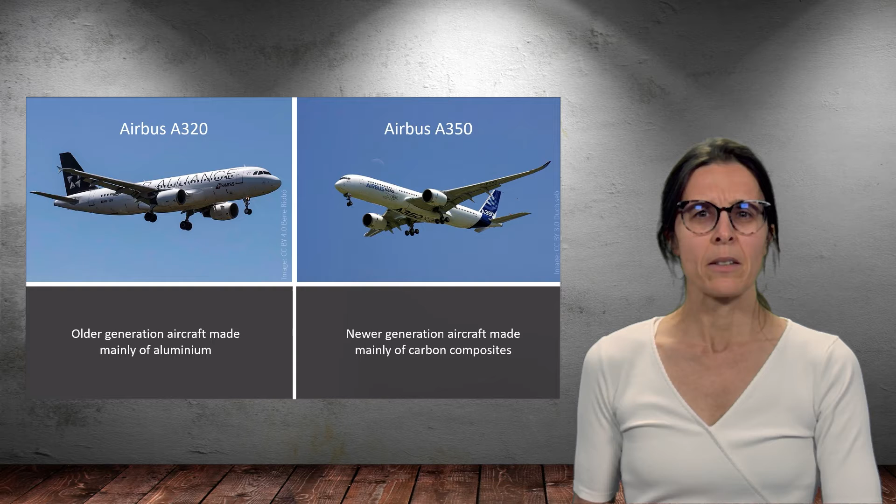As you learned before, newer aircraft such as the Airbus A350 or the Boeing 787 favor the use of carbon composites in their structures. On the contrary, the structures of older aircraft such as the Boeing 737, the 747, or the Airbus A320 are mostly made from aluminum alloys. This shift in structural material from aluminum alloys to carbon composites is driven by a reduction in structural weight, which leads to lower fuel consumption and therefore lower emissions during operations. But how does this material shift influence the energy required to manufacture the aircraft?

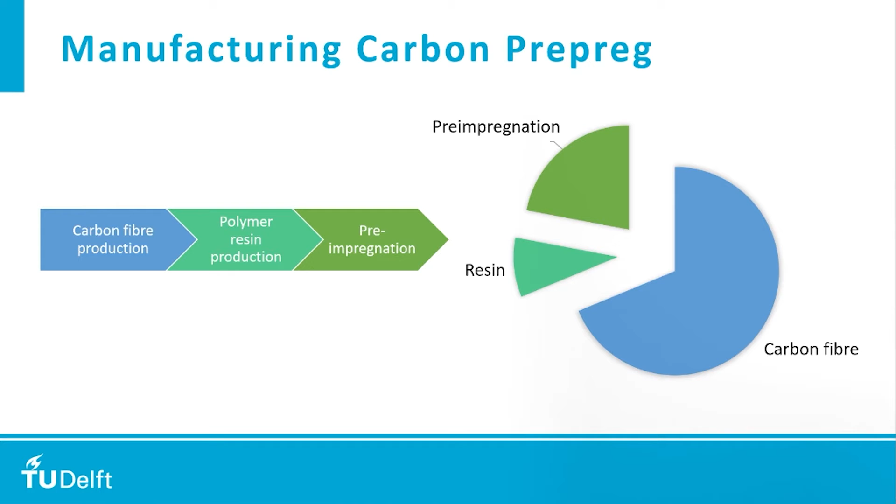Manufacturing of carbon composite prepreg comprises three major steps: manufacturing of carbon fiber, manufacturing of polymer matrix, and pre-impregnation of the fibers with the matrix. Of these three steps, carbon fiber manufacturing is the one that consumes the highest amount of energy, approximately 70% of the total. Carbon fibers are manufactured through the pyrolysis of a precursor material. Roughly 90% of the carbon fibers currently produced use a synthetic organic polymer called polyacrylonitrile, in short PAN, as a precursor material. The other 10% are based on pitch petroleum or rayon precursors.

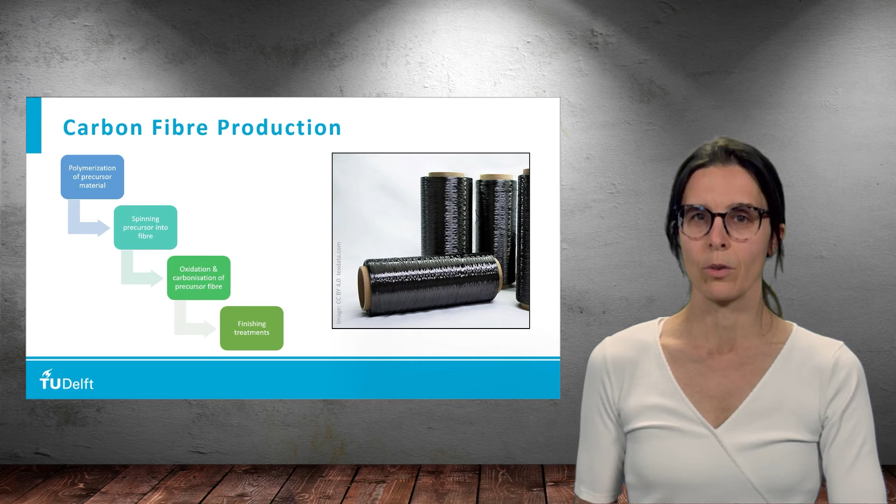Manufacturing of carbon fibers is a complex, very expensive, and as we saw before, a very energy-intensive process that comprises four steps. First, polymerization of the precursor material to create PAN of a certain molecular weight. Second, spinning of the PAN precursor into PAN fibers. Third, oxidation and carbonization, which is a series of heat treatment processes, usually within the 1000 to 3000 degrees Celsius range, that stabilize and burn off the non-carbon components in the original PAN fibers, resulting in tightly bonded carbon-rich fibers.

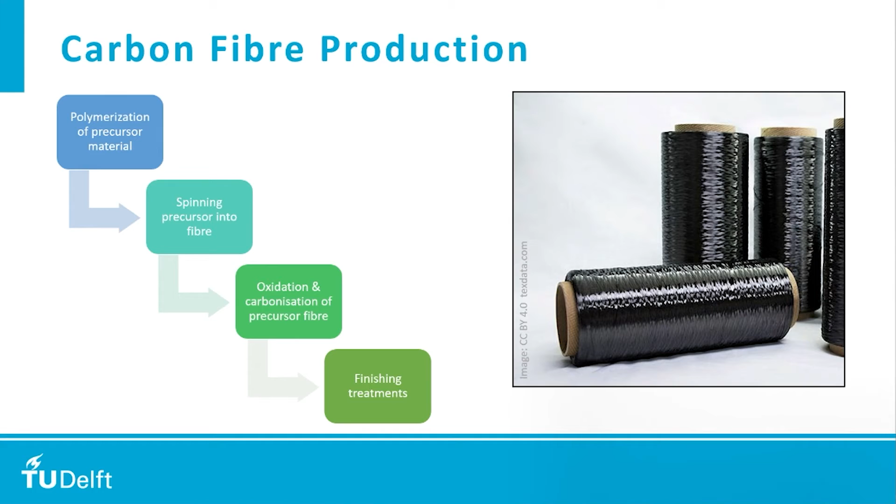Fourth, finishing processes which first entail the application of surface treatments and coatings, called sizing, to protect the fibers during subsequent processing and to enhance bonding to the polymer matrix. And second, winding of the fibers onto spools. The oxidation and carbonization step is the most energy-intensive, amounting to approximately 50% of the total energy consumed in the manufacturing of the carbon fibers. It is followed by the spinning process, which consumes approximately 25% of the total energy.

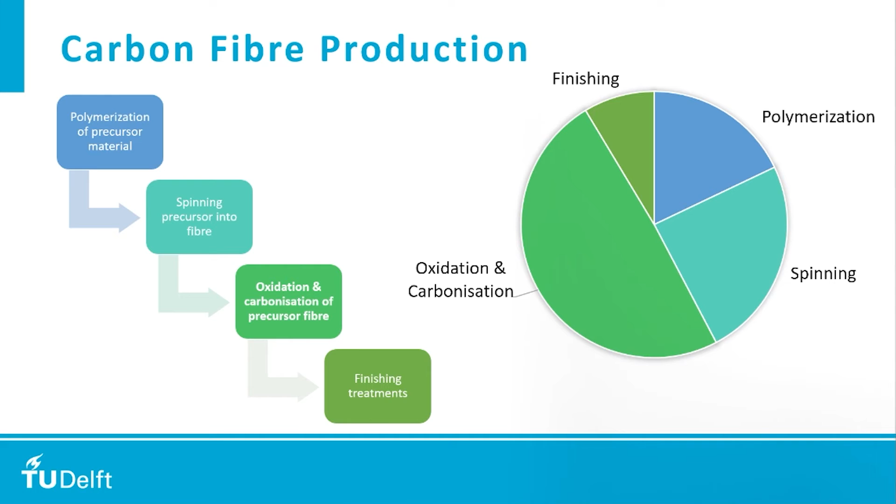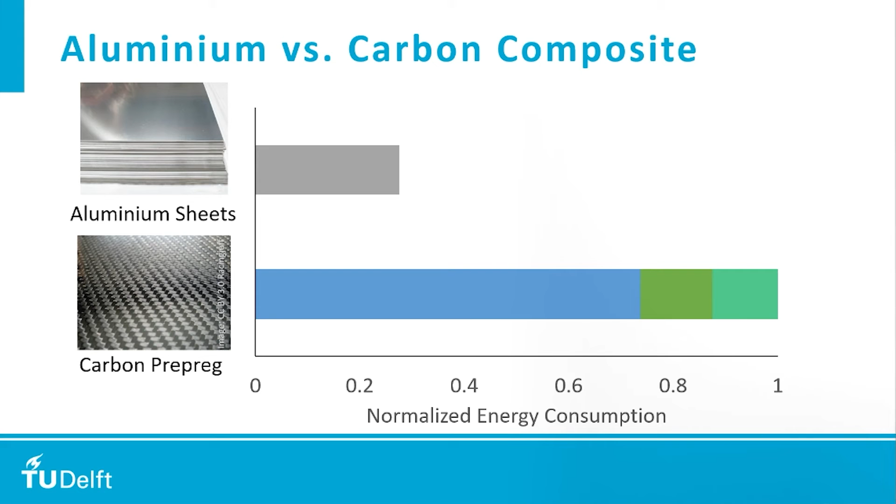When compared to manufacturing of aluminum sheets or plates, manufacturing of carbon composite prepreg is about 3.5 times more energy intensive. The major contributor to the energy consumed while manufacturing aluminum plates is the electrolysis process used to extract the aluminum from the stable compounds it forms in nature. So as it seems from this comparison, the material shift from aluminum alloys to carbon composites to build aircraft structures results in lower emissions during operations, but makes manufacturing significantly more energy intensive. The good news is that the carbon composite manufacturing industry is relatively young, and therefore it has ample room for optimization, with estimated potential energy savings that amount to 85%, considering both state-of-the-art best practices and ongoing research.

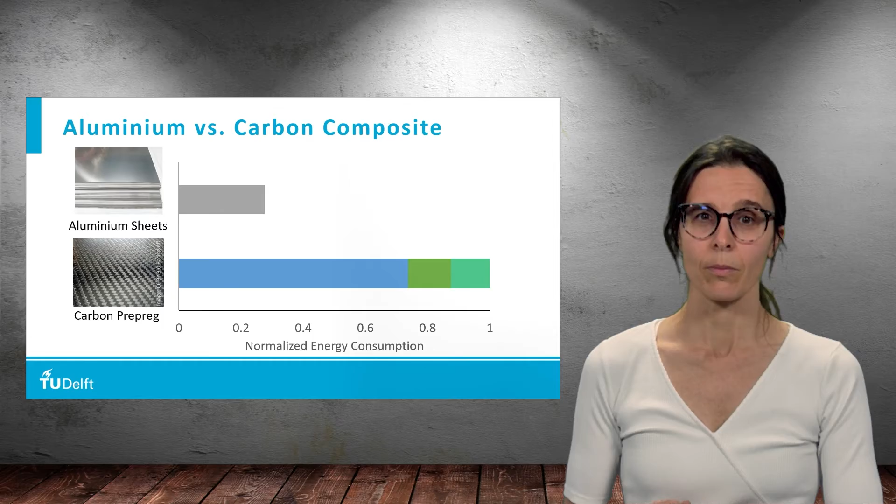Some of the most significant energy savings can be achieved in the oxidation and carbonization step during carbon fiber manufacturing. Short to medium term energy savings can be achieved by using on-site energy production, using more efficient furnaces, using enhanced heat transfer and heat retention systems, and implementing waste energy recovery procedures. In the longer term, the use of selective heating methods, such as microwave heating, which targets heating in the carbon fibers, is expected to further increase energy savings. Another important future energy saving approach is the use of alternative, less energy-intensive precursor materials such as polyolefins, or, very important for a circular economy, recycled carbon fibers.

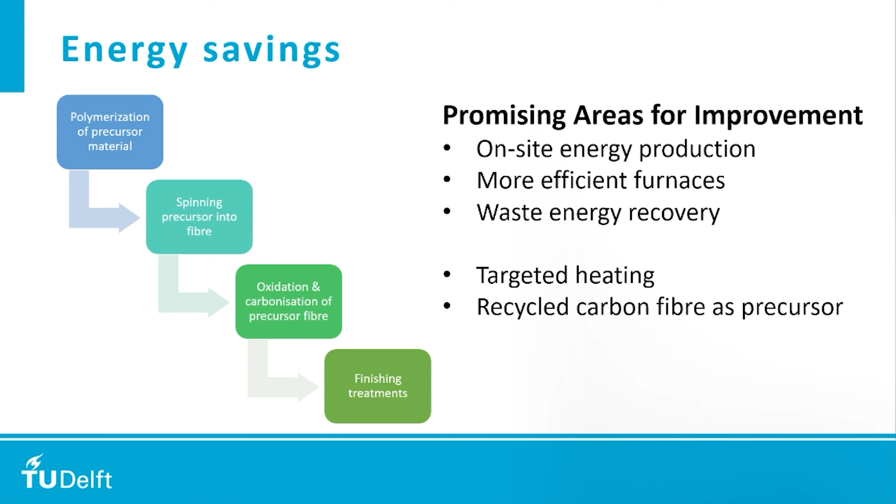In summary, selecting the lighter weight material is not necessarily the most sustainable solution for all phases in the life of the aircraft. Indeed, manufacturing of carbon fiber composites is several times more energy-intensive than manufacturing of aluminum plates. Fortunately, there is still ample room for improvement in the carbon fiber manufacturing industry.